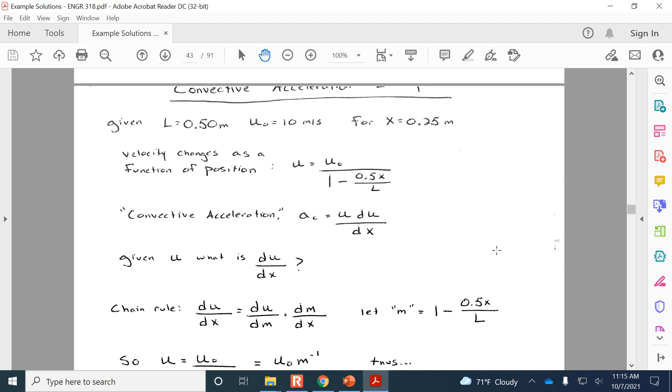In other words, that's like saying the velocity at a certain point is the initial velocity multiplied by m to the minus 1 power. Okay, so if that's the case, then du dx is d(u naught times m to the minus 1) relative to dm, multiplied by d, and let's actually substitute in the function here, (1 minus 0.5 x divided by L) dx.

All right, so now if we take the derivative of this with respect to m, what that leaves us with is minus 1 times u naught m to the minus 2 power. And then on the right-hand side here, the second term that we're multiplying by, we're taking the derivative of this function in the brackets with respect to x, then what's left over is just negative 0.5 divided by L. Okay? And remember that m was 1 minus 0.5 x divided by L. So we're going to resubstitute that back into the equation.

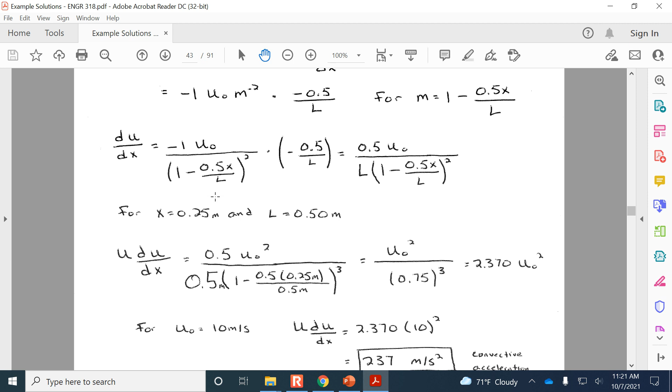Here at the middle, it's 237 meters per second squared, just based on this function, which is a reflection of the taper angle of the nozzle. So if I remember correctly, you'll need to apply these same ideas on the homework assignment, where you have to know, for instance, that the convective acceleration is the velocity at a certain point multiplied by the velocity gradient, du dx.

So you evaluate, find what is the velocity at the location of interest, if you've got an equation defining that, and you multiply it. Sometimes the velocity gradient is given directly. You don't always have to use the chain rule to define it. Sometimes they'll just tell you directly what is the change in velocity with respect to position.

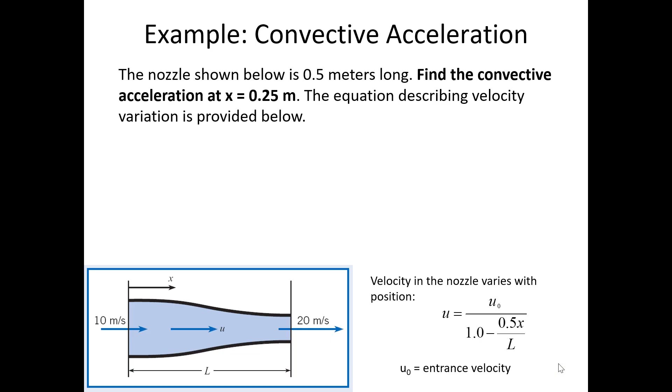So that's convective acceleration. And just to review some of the definitions of last time, steady flow is when the velocity is constant with respect to time, meaning that there's no local acceleration. Uniform flow is when velocity is constant with respect to position, meaning that there's no convective acceleration. So local and convective, these two different types of acceleration, both cause changes in pressure, and they each have different formulas that are used to calculate the change in pressure.

In today's class, we're going to be talking about Euler's equation, which applies local acceleration to a flow field and calculates a change in pressure. And in a future class meeting, we will look at the effects of convective acceleration, which is applied using Bernoulli's equation. In our lab next Tuesday, we'll be using Bernoulli's equation to look at a change in pressure through a contracting nozzle.

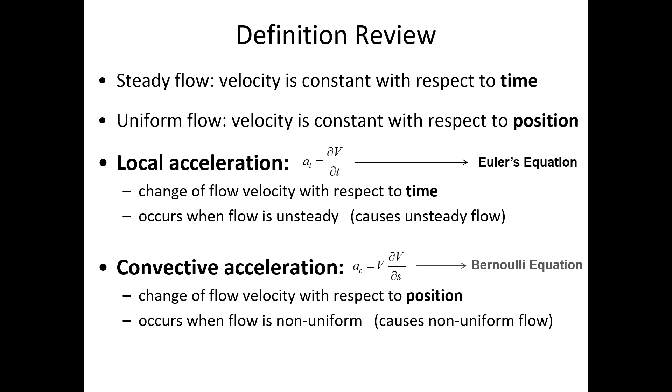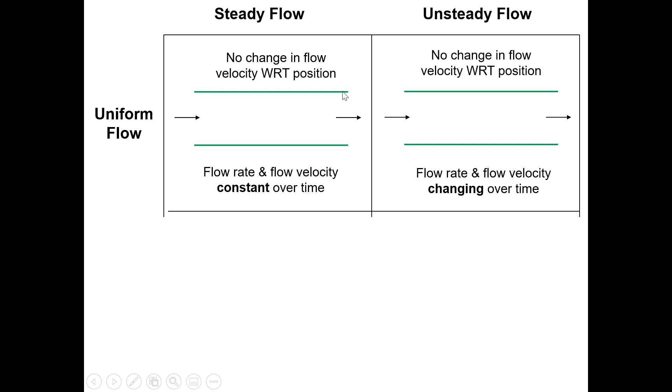Just to summarize, steady flow, remember, is when it's constant over time. Unsteady flow is when the flow velocity is changing over time. But in both of these cases, because the pipe walls are parallel, that means that there's no change in the velocity with respect to position.

But you could have a nozzle where you have either the diameter expanding or contracting, and then that would mean that you have non-uniform flow and the flow velocity is changing with respect to position. But there can be both unsteady and non-uniform flow at the same time.

If you had unsteady and non-uniform flow, then what that means is that there's an increasing velocity over time in some sort of a flow field that is contracting or expanding, so that the flow velocity is also changing with respect to position. So I wanted to point this out.

It's a 2x2 matrix where you can have steady uniform flow, you can have unsteady uniform flow, you could have steady non-uniform, and then most complex of all is when the pressure is changing both because the flow is experiencing convective and local acceleration simultaneously.

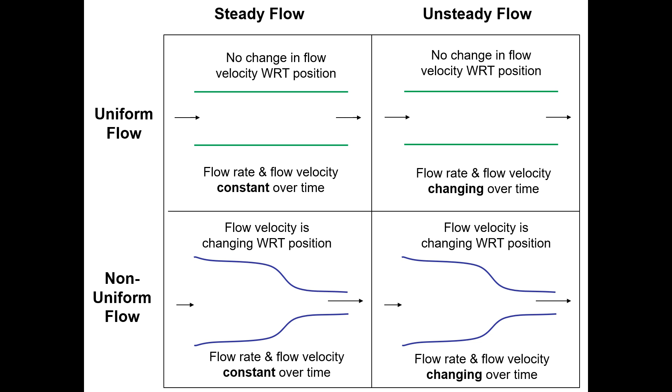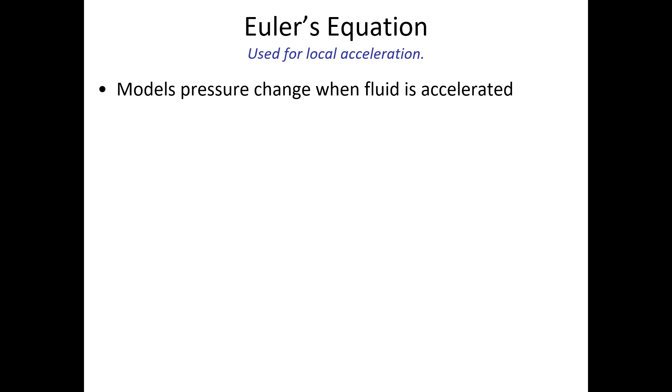So Euler's equation is used for local acceleration, and it models the pressure that is experienced by a fluid when it's accelerated over time. And the hydrostatic equation already tells us what happens if it's not moving at all. And remember, the formula for the hydrostatic equation is simply that delta P is delta H times gamma. And there is an acceleration built into the hydrostatic equation. The hydrostatic equation is assuming the gravitational acceleration of g.

But what if the tank is accelerating upward so that it's experiencing the effects of gravity and also an additional 9.81 meters per second squared? So think about how the pressure would be increasing as you go down through the fluid if the tank is accelerated up. The change in pressure for each unit of depth would effectively be double then, because there's already the 9.81 meters per second squared gravitational acceleration.

And then if you're accelerating upward at that same rate, then the change in pressure would be the sum of the gravitational effect and the physical acceleration that it's experiencing. Now, I'm a little bit reluctant to even mention that thought to you, that you have to somehow account for gravity and also the acceleration that the tank is undergoing, because you don't need to account for it separately when you use Euler's equation. This is just kind of a thought experiment to make you comfortable with the idea that this tank of water is going to have even more pressure at the bottom if it's being accelerated up.

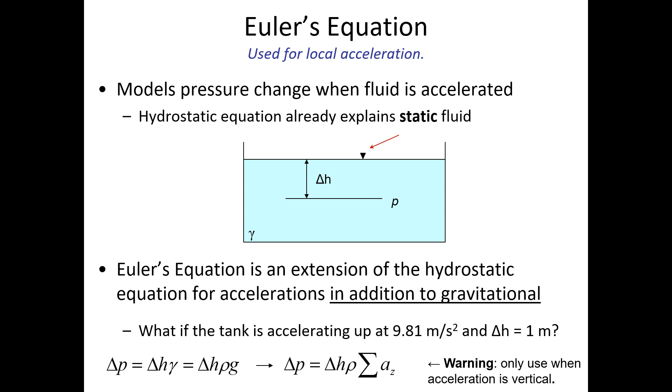Okay, so the origin of Euler's equation is best understood if we consider Newton's second law and the fact that an element of water is being accelerated, the local acceleration, and it's experiencing an acceleration because of an imbalance in forces. That's what causes acceleration, the fact that the water is being pushed more on the left side perhaps than on the right side. So here, think about if we had a cylinder of water.

It's just in a flow field, one of the elements that we could create, like you could define our system as being this cylindrical shape, and because it has mass, if this is on Earth now, let's return back to just a normal earthly environment where there is gravitational acceleration.

So that means that the weight of the water would be acting downward, and there would be some pressure that's acting on the left side of this cylinder of water, and there would also be pressure acting on the right side of it. It would be different than the pressure acting on the left side because it looks like this is vertically oriented in part, and so the pressure would be less. The delta P could be a reduction in pressure if it is not as deep in the water.

So in some direction, in the L direction, if we accelerate this fluid, because it's experiencing a local acceleration, then there's going to be a change in pressure from that as well. So some of the questions we would need to ask to do a force balance is, how much mass does this fluid have? If we're going to do a force balance, then the force that's acting in the L direction, external, would be the pressure that this is experiencing. So pressure times the cross-sectional area. So then that would be a force that's acting in the L direction.

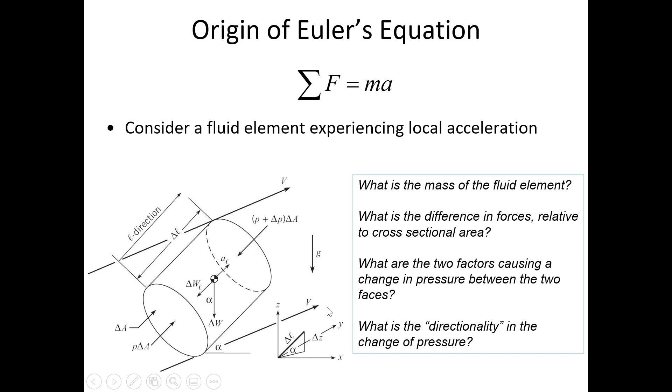So gamma here depends on G. It depends on the normal Earth's gravitational acceleration. The gamma doesn't depend on the acceleration being experienced by the fluid. So you just use the normal unit weight of the fluid inside the parentheses here. And so what this is saying is that the change of the piezometric pressure in the increment between 2 points is negative, so it's increasing in the opposite direction from the acceleration. So there are 2 points some distance apart, delta x apart.

So delta x is how far apart location 2 and location 1 are. And according to our standard method of keeping track of what is considered a positive direction for the acceleration, we have to use a standard approach of saying that to the right would be positive x. So that, if the fluid particle was moving rightward, then we'd assume a positive acceleration.

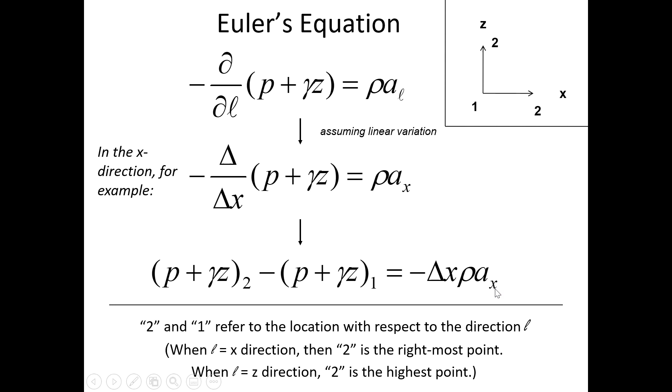Just think about when you hold a glass of water. If you were in a car holding a glass of water and suddenly the car slows down, the water would spill out of your cup forward. But let's say that the car is accelerating forward and you're holding a glass of water. If you accelerate forward, then the water is going to spill onto you. So in this case, the truck is slowing down, so the liquid wants to continue moving forward. And so there's an increase in pressure at A. So there's more pressure at A than there is at T.

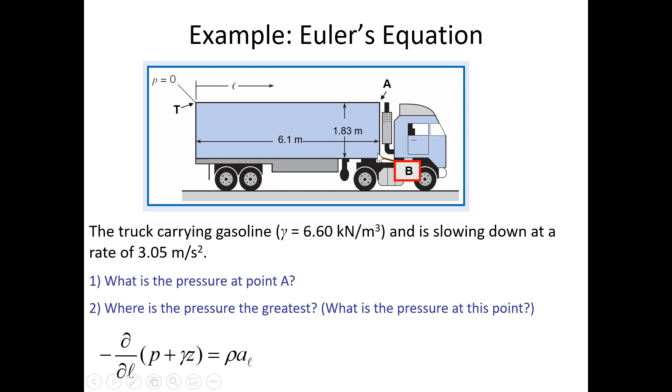Now, instead of just going from T to A, let's apply Euler's equation between location T, where we know the pressure is 0, and location B. And we can do that because there's only acceleration in one direction. It's in the x direction. If this tank was accelerating both sideways and vertically, then you can't go directly from one corner to the other. If it was accelerating up and to the side, then we'd have to go from T to A using the horizontal acceleration, and then from A to B using the vertical acceleration. But this is a little bit simpler than that. This is just accelerating in one direction.

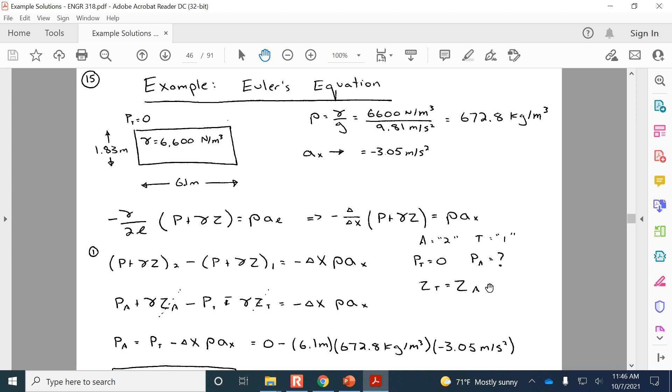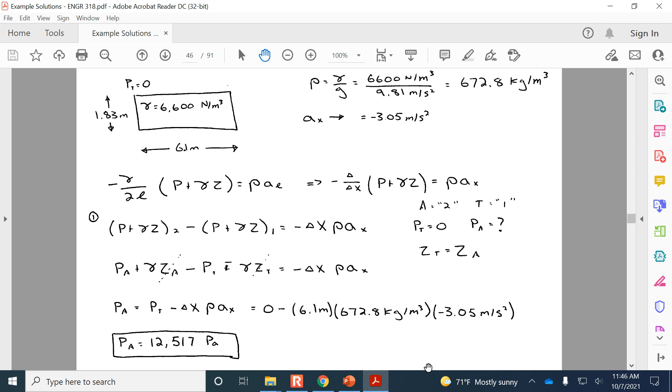So far, we have found the pressure at A is 12,517 pascals. And now we're going to see if we can calculate the pressure at B. The pressure at B is going to be more than the pressure at A because it's lower in the fluid, beneath A. So there's this pressure effect that was caused by the deceleration, and on top of that is the pressure increase that comes from being down inside of a fluid. We could call that the hydrostatic effect, except that this isn't water and it's not static. But still, as you go down through a fluid, if there's no acceleration in the vertical direction, then the pressure is going to increase at the rate described by gamma.

Okay, so let's continue this example. On the other whiteboard, let's find out the pressure at location B. Okay, so we're going to go from location T to B. So that means that T is 1 and B is 2, because location B is further to the right.

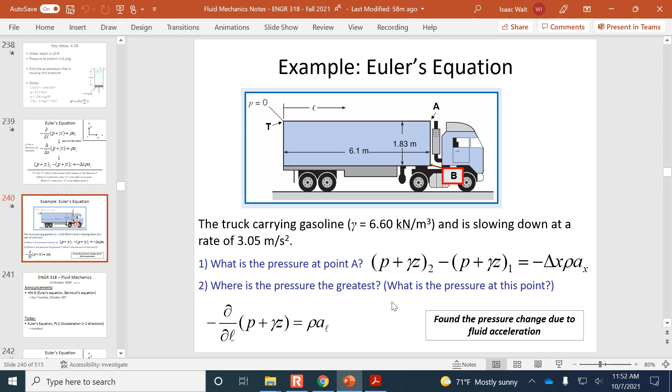You can think of this as like the hydrostatic part of it. The 12,078 pascals is because the pressure increases as you go down through the fluid. So that's the hydrostatic component. And then the 12,517, that's the part that was caused by the fluid being accelerated to the left.

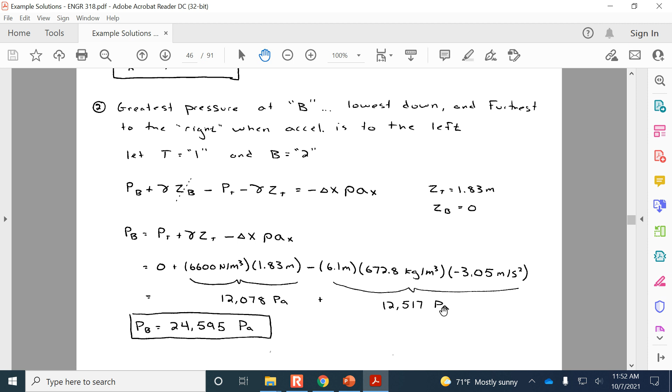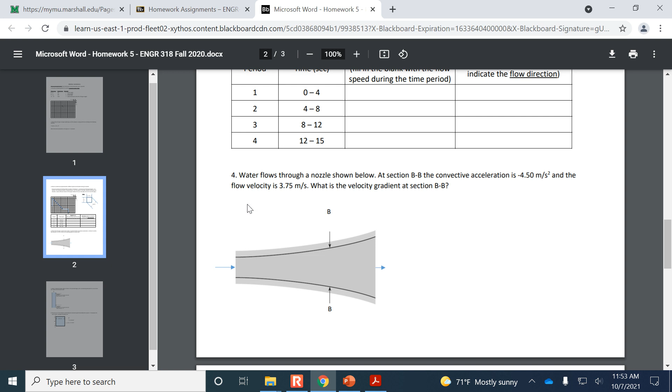Let's pull up the homework assignment and look at a couple of problems just to try and interpret and apply what we've talked about today to the questions that you need to answer. Problem 4 is so easy. I hope you appreciate how easy that problem is.

All right. Problem 5 is a problem where the fluid is accelerating downward at a rate of 12.5 meters per second squared. So we just did Euler's equation in the horizontal direction. So the acceleration was in x in this example. In problem 5, the fluid is moving vertically. So it's in the z direction. So Euler's equation looks a little bit different when you're applying it in the z direction.

When you're applying it in the z direction, it is pressure plus gamma z at location 2 minus pressure plus gamma z at location 1 is equal to negative delta z times density times the acceleration in the vertical direction. So the difference here is instead of delta x, when we're applying it vertically, it's delta z. Okay, so that's one thing I wanted to point out. But let's together talk about how we would apply this equation, Euler's equation, to problem 5.

So who remembers what the rule is for determining what gets assigned as location 2 versus location 1? On that last example with the truck, it was whichever point is further to the right is location 2, since the acceleration was horizontal. When it's vertical, what's 2 and what's 1? The point that's higher is 2.

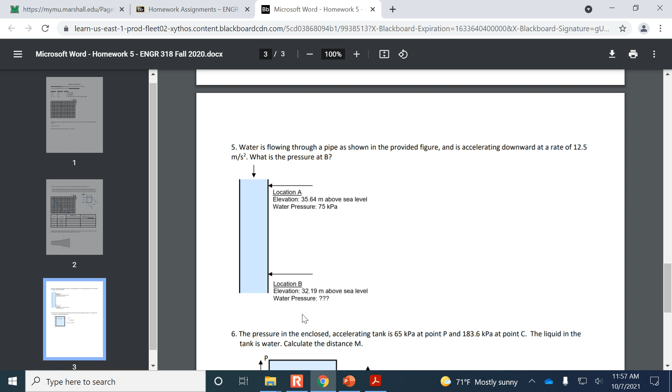All right. Now, problem 6 is a little tricky because this is accelerating both upward and also to the right. So the pressure in the enclosed accelerating tank is 65 kPa at point P. So here's point P. And then 183.6 kilopascals at point C. So we want to find the distance between them.

So it's the same basic formula. Let's just, for this next problem, reassign the locations based on what we know. We don't have an A and a B like we did in the other one. So let me erase that. What's location 1? If we're trying to find this P and C, and we're accelerating vertically, then what is location 2? It's P, because it's the one that's further up.

So it's the pressure at P plus gamma ZP minus the pressure at C minus gamma ZC is equal to minus delta Z, density, acceleration Z. Now, the fact that it's accelerating sideways does not change anything about the pressure change between P and C.